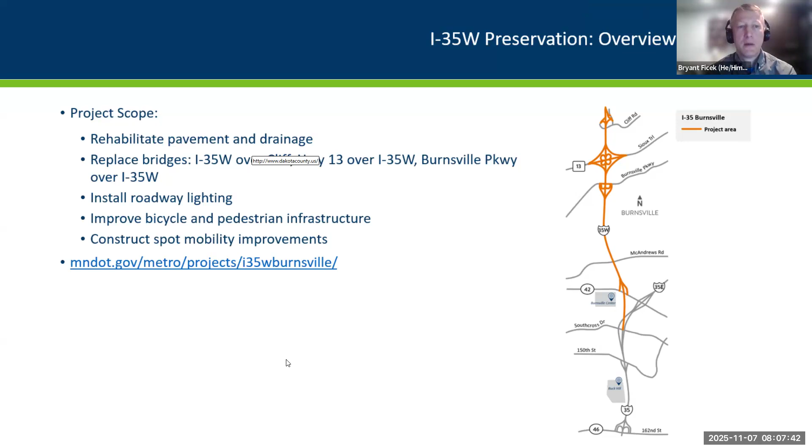I'm going to go to the next slide. So the work this year really focused on the southbound direction and the associated ramps, with some work on the other sides as well, but mainly focused on that southbound. Happy to report, as we sit here on the 7th, we're getting to the end of that. Things are starting to open up.

So the first couple bullets there, pictured, is that southbound 35W exit to County Road 42 is now open. Buck Hill Road's open — you've got the new roundabout there. Really looking forward to seeing how that works in traffic and hoping to smooth out some of the operations, not only on 35W, but really for the county road there.

Then the next few bullets — again, we're getting towards the end of the construction season. So later today, probably not till the evening, Highway 13 should go back to 4 lanes, 2 lanes in each direction, so that'll open up again. A week from now, Burnsville Parkway will finally reopen, giving you that east-west connection back, and again traffic somewhat returning to normal.

So there's still some work on the ramps — you'll still see some activity there, but we're really trying to get everything wrapped up by the 14th or 15th. The one aspect that does remain closed is Cliff Road under 35W. We need to keep that closed as we're still doing some work in the bridge area there, and we can't have anybody traveling underneath where we're working. So that's the one spot that remains closed, but everything else should be opening up.

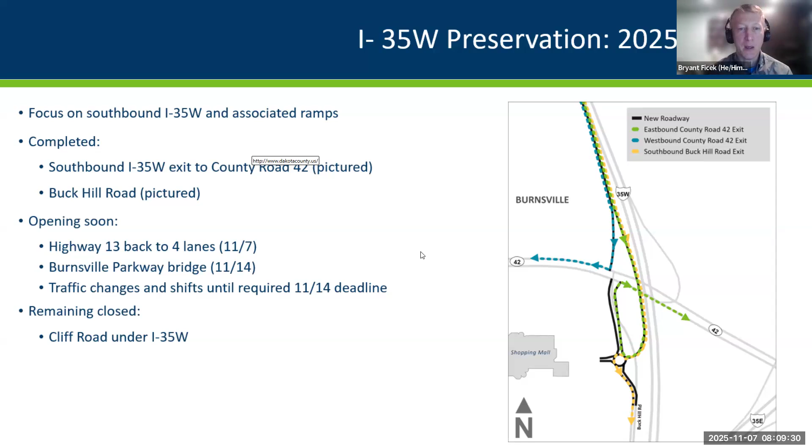So as we look forward to 2026, the traffic impacts will be focused on the northbound side as we work on the other side of the road. You will see some of the same impacts that we saw this year. Highway 13 will go back to one lane in each direction. Cliff Road will stay closed, and some of the entrance and exit ramps will close as we work on those as well.

Not noted here, but Burnsville Parkway will be open. Once that's opened, it will not be closed, so there will be an extra route across that you didn't have this year. So really happy to get that done and be able to say that'll be open and be a good route for people.

We are looking to start in April, depending on weather, and looking for completion in October. So it'll be another full construction season with these impacts, but it will be better than this year, simply because Burnsville Parkway will be open. Next slide.

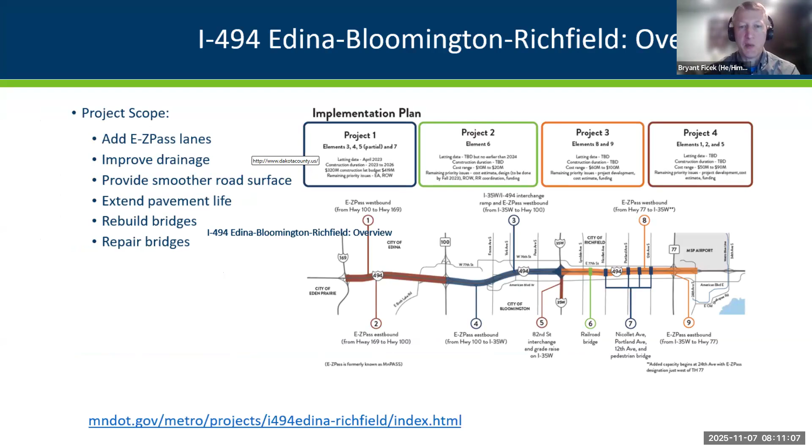Moving on to the next one, 494. Again, this is a little outside your area, but there was interest in this. Obviously a major route, so want to make sure you're aware of what's going on there. This picture shows the overview of what we're trying to do out there, and the big change is adding EZ Pass lanes and adding capacity, trying to help traffic as they move through the corridor.

We can go to the next slide. So what's happening now is what we call Project One, adding EZ Pass between 35W and East Bush Lake Road, and lots of other things along with it, noted in the bullets there. A lot of that work is being completed.

Same thing as the 35W work - we're starting to reopen some of these things, starting to end the construction season. You'll see some of the improvements out there and start to see that return to normal. As we look forward to 2026, the work will be mainly on the local systems, some of the bridges there, maybe some work on the exit and entrance ramps again, and really looking to implement the EZ Pass system in that section we've got completed.

So there may be lane closures, you'll see some testing of the system, some activity in that regard, but it should be a lot more open than it was this year. Again, a lot of those improvements in place, which should be a benefit to everyone traveling along there. Next slide.

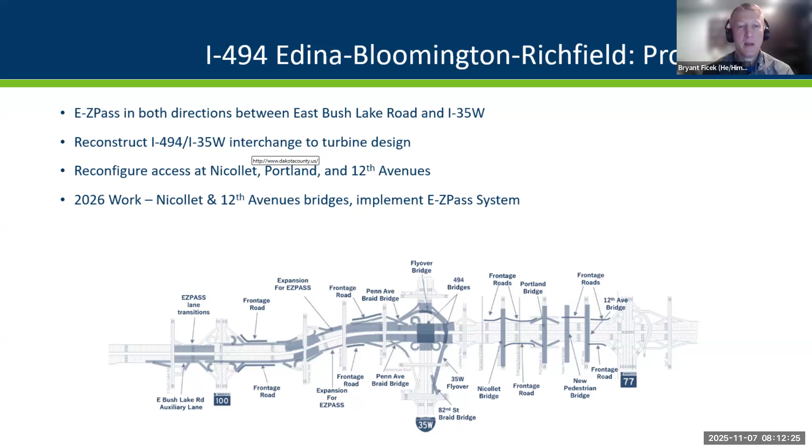So then we look forward to Project Two that we have. Just as we're working now between 35W and East Bush Lake Road, this one is going to shift to the east - we'll be looking at 35W to 77, that orange area to the east of 35W. This is very similar to what we had on the west side.

We're going to be looking to expand, add capacity in the form of those EZ Pass lanes, reconstruct different ramps and bridges, and really update the pedestrian infrastructure. We're in design right now, looking at that, so that's not going to begin till '27. So we have a little bit of time. If I'm back next year, I'll be able to tell you more at that time what those traffic impacts might be. Next slide.

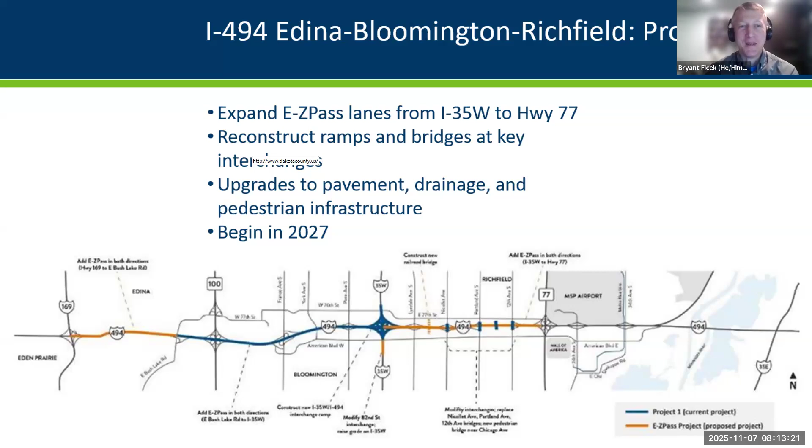Okay, Highway 77, another one coming up. Very similar purpose to the other ones - looking to rehabilitate the pavement, improve the drainage, and improve the bike and pedestrian infrastructure. This one is looking to start next year, but we're well aware that there's ongoing work on 35W. We do not want to close down both north-south routes at the same time, so what we're doing out here should be pretty limited.

There is work around the 77/35E interchange, looking at those entrance and exit ramps and loops, redoing that pavement. And then there's work at the north end, closer to the bridges that we'll be doing, and some lane closures as we strengthen the shoulders and get ready for some crossovers.

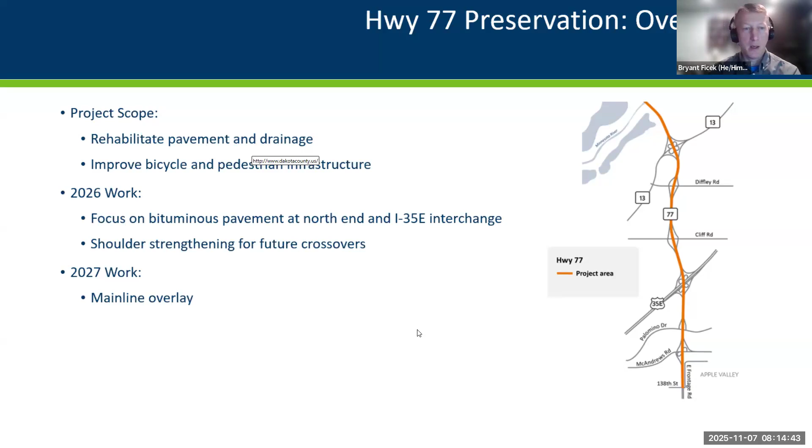Really, the focus of that work next year is mainly looking ahead to '27. We tried to minimize as much as we could the '26 work, knowing that we're still wrapping up 35W. And in '27, that's when you'll see more of the mainline work and crossovers, some head-to-head traffic, that sort of thing. So again, most of the activity will happen in '27. Next slide.

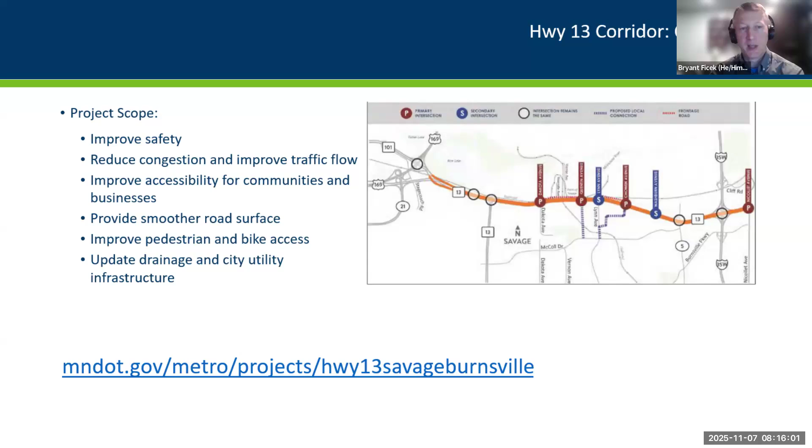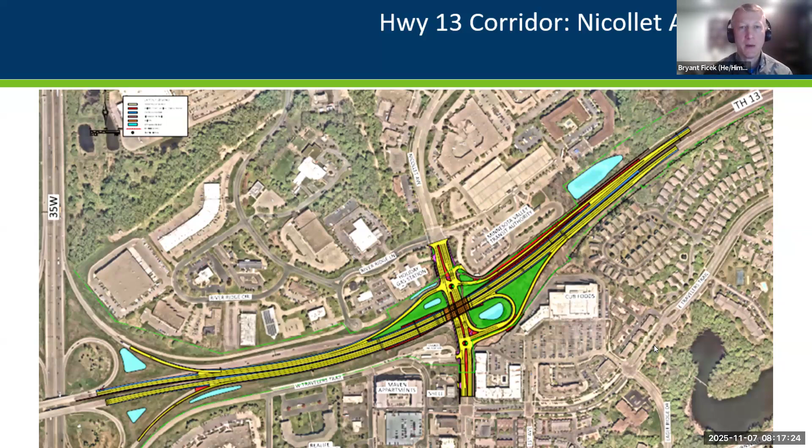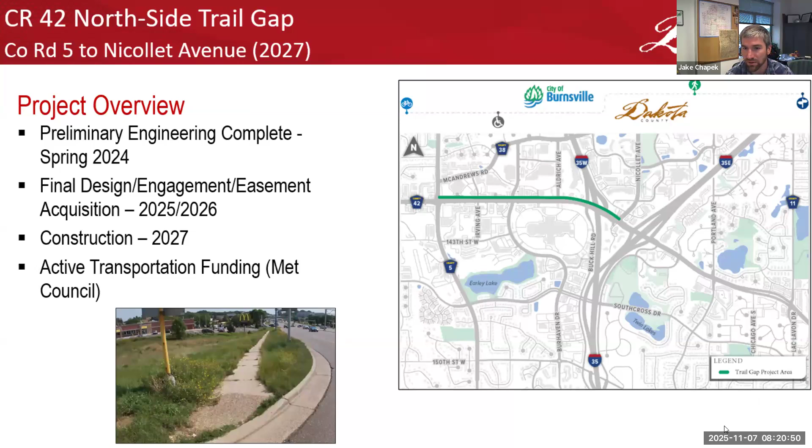So next slide, Jennifer. The first project covered here is along County Road 42. We have a trail gap, or really it's a trail conversion - we're converting the sidewalk along County Road 42 from County Road 5 east to Nicollet, kind of in that Burnsville Mall area. It'll get converted to a 10-foot shared use trail. We did some preliminary engineering on this in '24, and our project management group has this one off the ground. We just started final design recently, looking to move this into construction in '27. Good news is we did get some active transportation funding on this, so it's an all-around good project that we'll be looking to bring to the area.

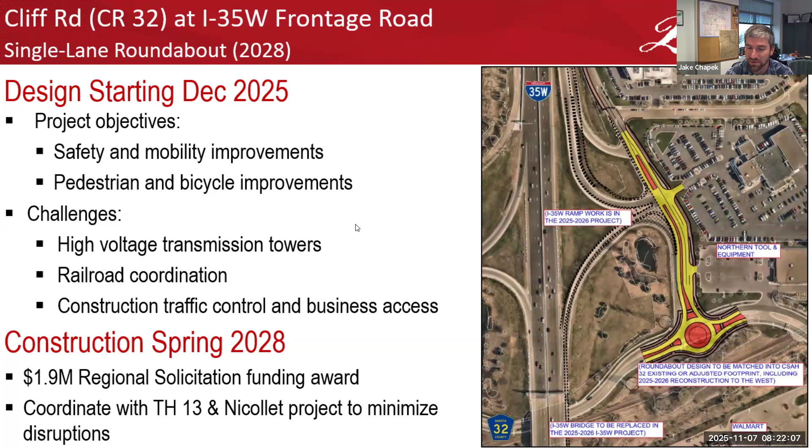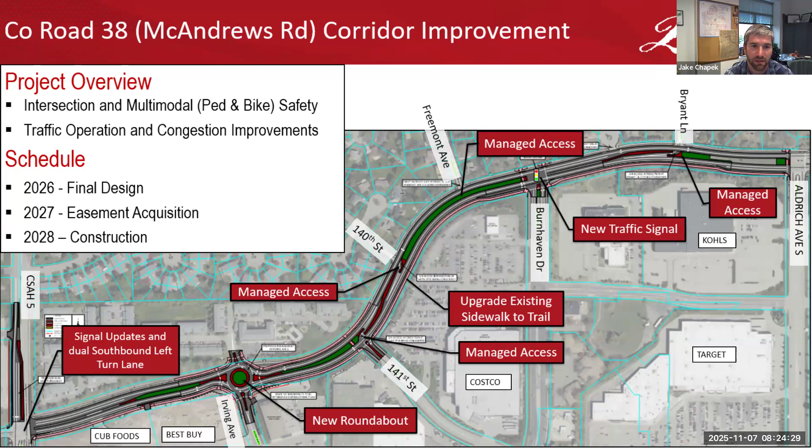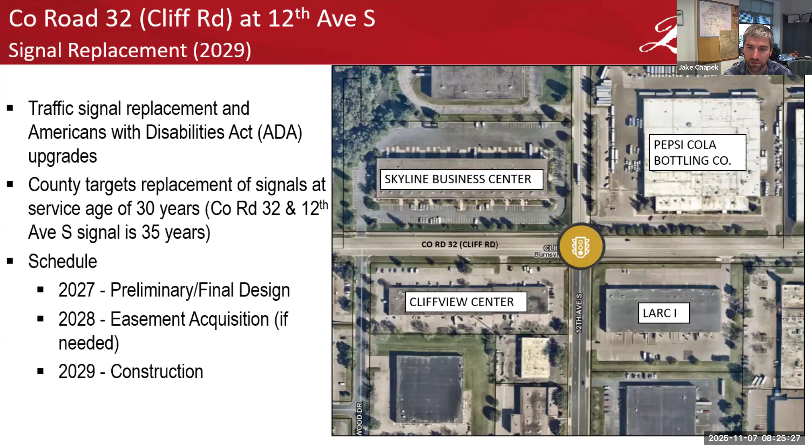So this one will be starting in '27 with ultimate construction in '29. Next slide, please.

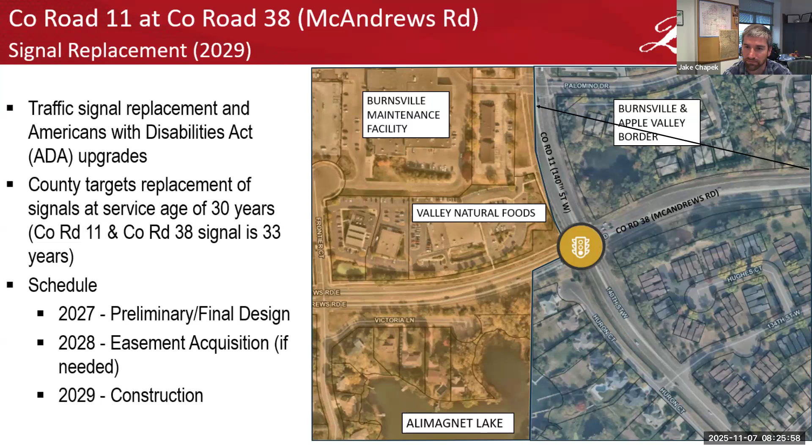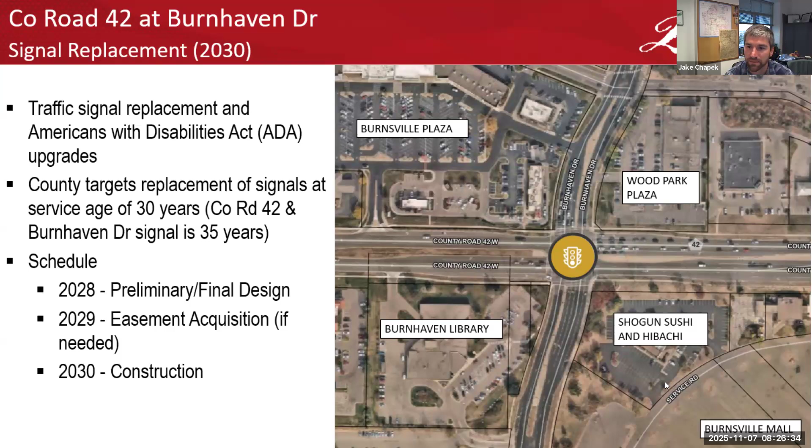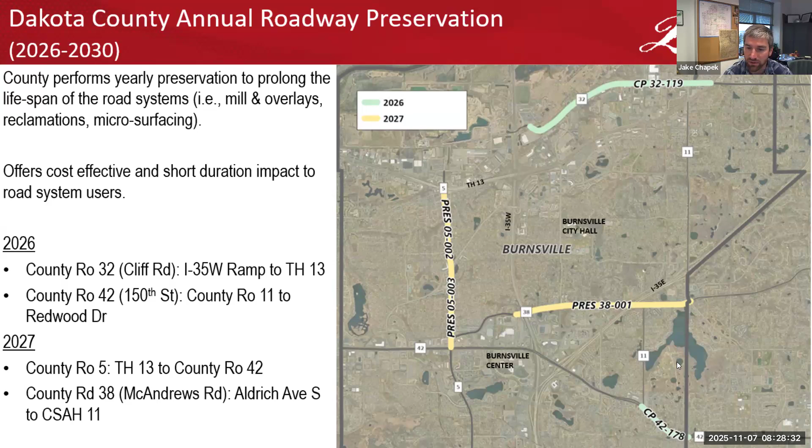With this work, we also do the ADA improvements. So we bring all the ped ramps at the intersections, those quadrants, up to current standards. Generally you'll see that concrete work, the curb lines, the ramps - we'll come in and do a lot of that work first, and then we'll come through and clean it up with a pretty short duration preservation, mill and overlay type activities. Next slide.

So yeah, with that, I guess that kind of concludes. Of course, every one of our projects, we have a public webpage on our county website, so there's more information that can be shared or gathered there, but also feel free to contact me directly - it's my email address. Happy to answer any questions, either today or really at any point moving forward. So thanks for the time today.

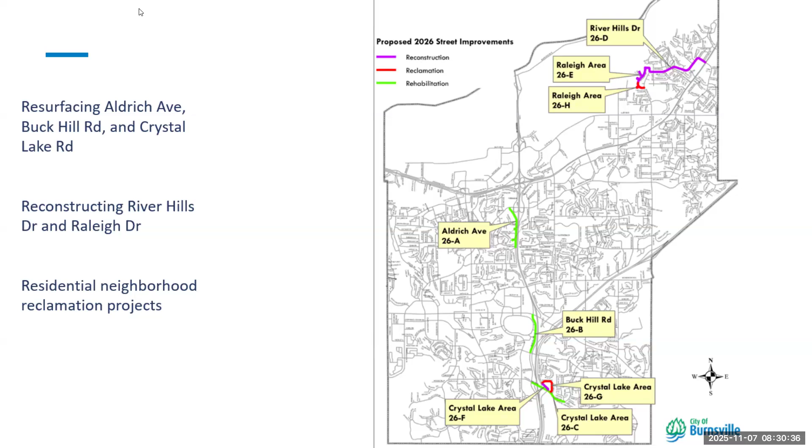And then same treatment on Aldrich Avenue. There's a pretty high density commercial area on the north segment of Aldrich Avenue there. A big focus of our pavement management plan is, whenever we have these larger volume streets, especially by businesses, we like to not let those go to the point of needing full reconstruction, and try to get in there sooner and just do the rehabilitation to reduce the impact to the businesses and to the traveling public.

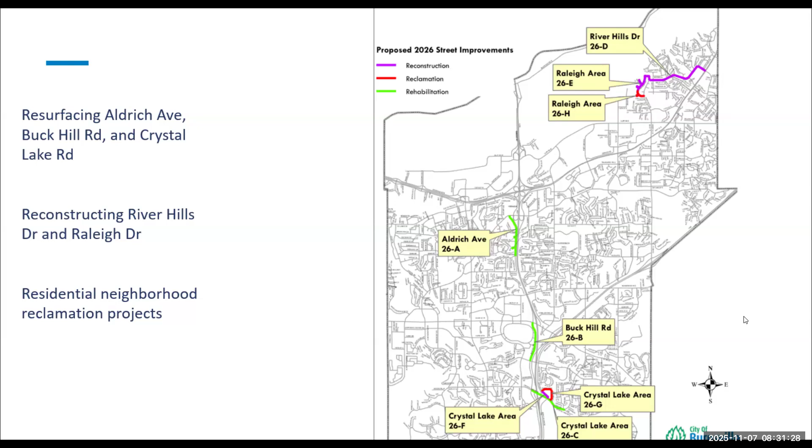So those are the two big ones that will be affecting some commercial properties here in Burnsville. We also have some residential reclamation projects - we're doing a little loop there around Crystal Lake. And then our big reconstruction project for next year is in the residential area called River Hills Drive and Raleigh, which is a full water main replacement project. That's going to be a big one for us, but luckily not impacting too many businesses over there. Next slide.

Now we're just going to share a little success of some of our 2025 projects. Williams Drive is effectively done. I say effectively because the traffic signal at Judicial Road is not installed yet. There were some delays with the physical equipment needed, so that's getting installed in about a month, and then the street will be functioning as intended. Right now Judicial is just a minor street stop control, operating the same as prior to the project, but in about a month the new signal will be up and running.

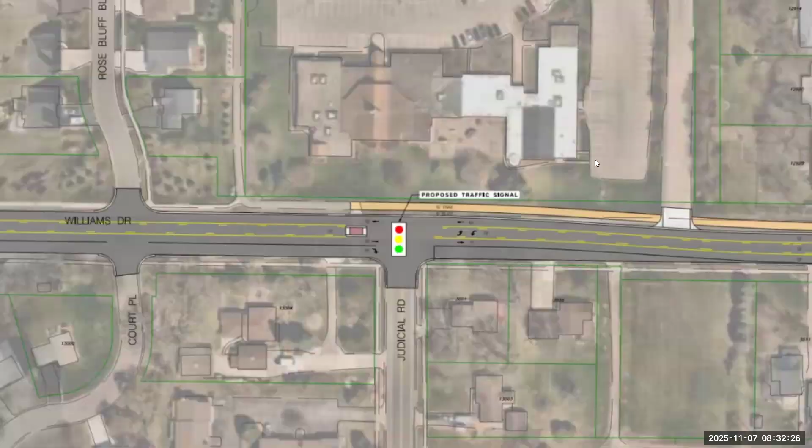We just wanted to share a nice picture of the 35W and Buck Hill off-ramp project. That was early September, and it is now completely done. It's been open for a little over a week now. We're pretty excited about that project. It was a huge partnership with Dakota County and MnDOT, and it's great to see it finally done. We've been talking about it for years, so just wanted to highlight that.

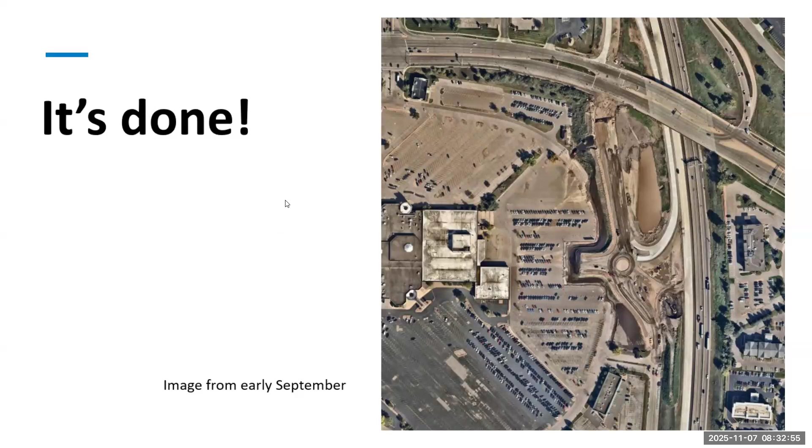And lastly, our Waze partnership. We've been working with Waze as a partner for a couple of years now, and at the city staff level, we take a lot of pride in keeping Waze updated and accurate so that users aren't directed into a closed road situation, so they can navigate Burnsville as effectively as possible. Waze feeds information directly to Google Maps, so Google Maps is also very accurate thanks to the work we're doing with Waze. Eventually Apple Maps picks it up as well. Sometimes it's pretty quick, sometimes it takes a little bit, but we try to promote the usage of Waze and other navigation apps on our social media when we have road closures in the city.

And we would encourage business owners to do the same and really leverage that resource for your customers that might be impacted by road closures.

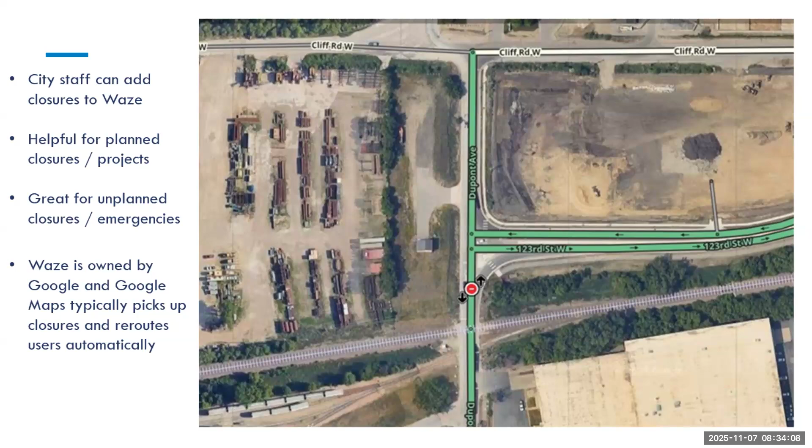I believe that's all I have.

Thank you, Logan. Great updates, there's so much going on, it's hard to keep track of, so we appreciate you keeping us in the loop on the 2026 street improvements and the things that are done. I do want to echo what you said about Waze. I know, thanks to Mark Ray, he's met with some of our businesses, and getting your Waze profiles updated with his help is really helpful to get your customers and employees to your space, and using it as an app to get around and get real-time updates when things are changing quickly.

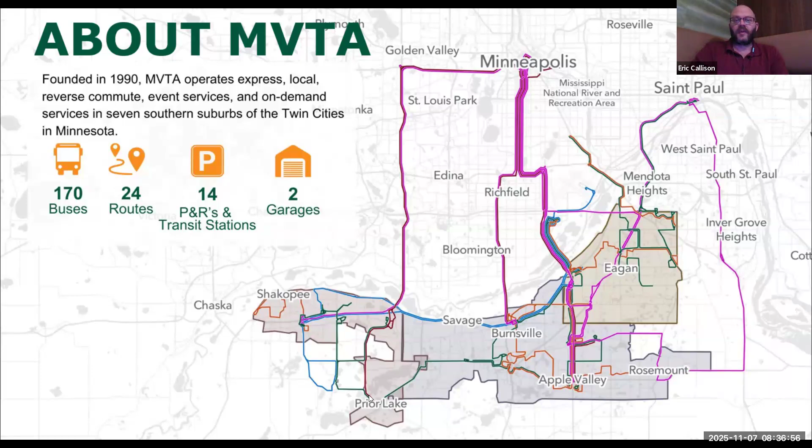Go ahead to the next slide. That's our base service, but in Burnsville itself we have 4 express routes as well as 5 local routes. We also have MVTA Connect, which is an on-demand service. It functions very similarly to Uber or Lyft, and it's through our Ride MVTA app that you can book a trip.

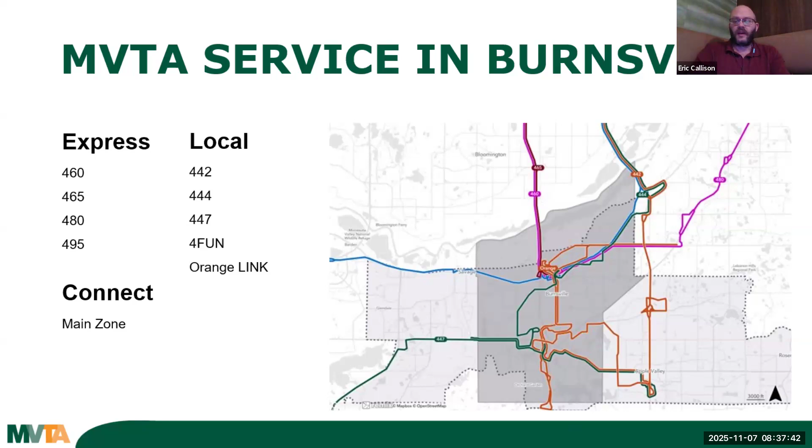You can see the connect zone boundaries in the dotted line here. It does cover pretty much all of Burnsville. So hopefully that's a resource for folks trying to reach your location if they don't have access to a car. Let's go to the next slide.

In addition to all of that service that we run every day, we also do a lot of event service. You may have ridden the bus to the State Fair or the Renaissance Festival from Burnsville. We also provide daily service to the airport, as well as service to many different concerts and sporting events on an as-needed basis. So for some folks, that's their introduction, or maybe the only reason they use MVTA, but that is very important. We're keeping cars off the road, we're keeping people moving. So that's an important part of our service as well.

The MSP parking - just want to put a quick plug in that we do have free overnight parking at the Burnsville Transit Station for up to 14 days. That's something we're trying to get more word out into the community about. I see that Amy from Experience Burnsville is on this call too, so thank you, Amy, for always pushing out that information for us and making sure community members are aware.

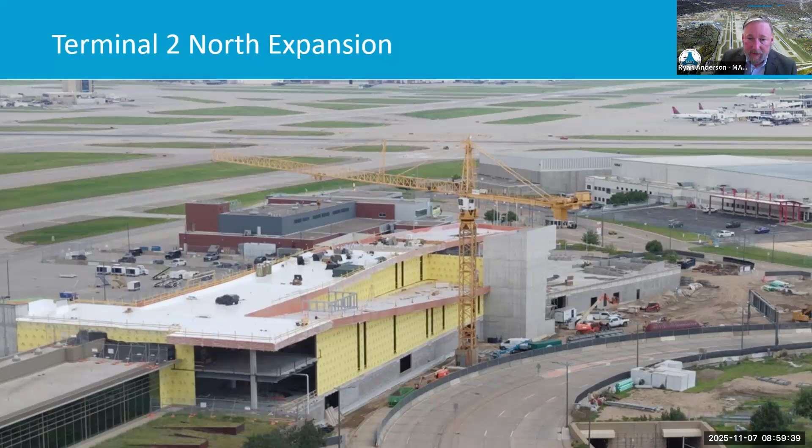As I mentioned, that'll add a couple of gates, H15 and 16. We're installing cross-laminated timber roof in place there, and new concession spaces and restrooms are also part of the project, which is aimed to be completed next year.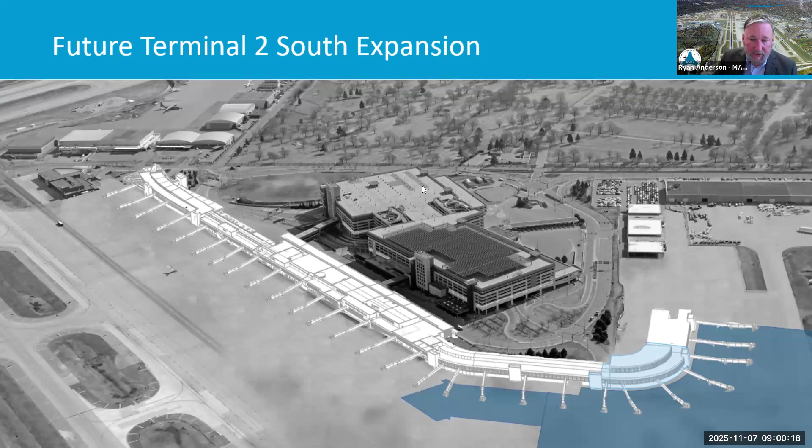Next slide. We're also focused on positioning the MAC for changes in the aviation industry and elevating the travel experience through new technology and innovation. Our investment is going beyond physical infrastructure. We're also investing in digital enhancements that are crucial to providing a positive airport experience.

Our customer relations management helps us connect with our travelers and visitors and promote various airport amenities, such as MSP Reserve, where you can actually reserve a position at the security checkpoint. Something I think most people don't realize that they can do.

We also have pre-booked parking. If you decide not to take advantage of the free parking and bus service offered by the MVTA, you can reserve a spot in our parking garage and save over drive-up rates. We also provide insider offers and discounts on the day of travel. So this is a foundation of a more modern and measurable digital engagement to understand who our customers are and how we can make their visit to our airport as enjoyable as possible.

Next slide. We're also investing in IT infrastructure to help improve the experience by supporting our federal partners, both the TSA and Customs and Border Protection. They both aim to reduce wait times flying out of MSP, and for the TSA, that means credential authentication technology as well as biometrics. Biometrics are also helping Customs ensure safe and secure movements of arriving international passengers through a simplified arrival, enhanced passenger processing flow.